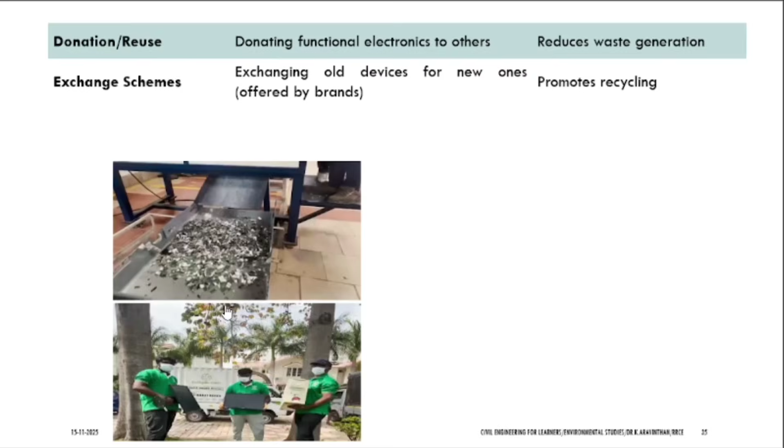In Bangalore you have a company called Zolopick, an organization. Whatever electronic waste you have, you just make a call for them, and they will come and pick the product from your house. It might be bulbs, electronic gadgets, whatever your e-waste is, they will give you the amount - whatever the resale amount is, they will give it to you. They will not ask for transportation charges etc.

Whatever your e-waste might be, from electronics items to ICT equipment etc., this Zolopick is available in Bangalore. This kind of thing is available, which you have to be aware of.

Sir, where to dispose you will not be knowing - we will put the used bulbs with the normal recycling bins. It should not be made that way. Why? Because fluorescent lamp bulbs contain mercury. If mercury is contaminated with the soil or water, it causes nervous problems for us.

Improper disposal through dustbin should not be made, as it causes pollution and health issues. Mobile phones, calculators, and old gadgets should not be thrown in landfill as waste. These are the basic principles.

After consuming e-waste, note that it should not be thrown in solid waste. Dry waste like plastics, glass items, paper waste, cardboard, and biodegradable items are called solid waste. You should not mix e-waste with solid waste. This is a rule. According to the Central Pollution Control Board, different types of waste are segregated.

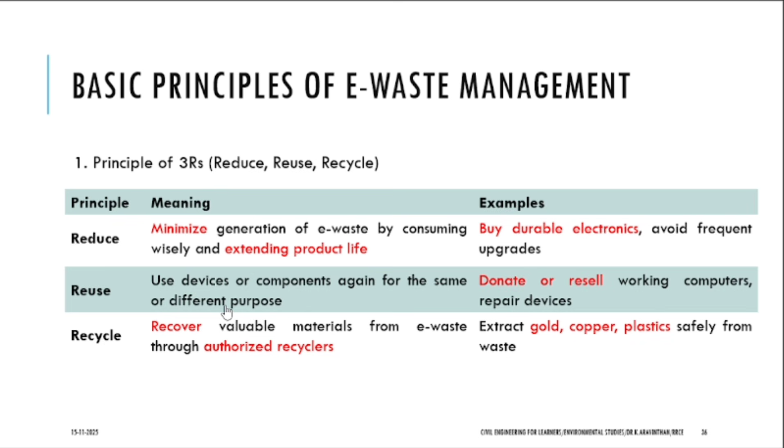So for this waste, either you have to minimize consumption, reuse, or recycle - the 3 R's. These three things only you should do. Or if it is not for use, you have to give it to the proper disposal places, not the dustbin.

Every product has a company, no? Electronic products, every product has a company. See, if you are disposing solid waste, you throw vegetables - do they have any company? No, that's why you cannot give it back. But for e-waste, everything has a manufacturer.

For the CCTV, for the wires, for the fan, check their website. I don't know how many of you have gone through that website. In this website, under e-waste management, if you call their e-waste management number, they will come to your doorstep and pick up the waste. You don't need to dispose it anywhere for any charges.

The manufacturer has a responsibility. They will come because in 2022, an amendment came. What is that amendment? It is EPR - Extended Producer Responsibility. There is a law according to 2022.

Every manufacturer should come and collect for free. They should dispose and recycle it. It is under the law. They cannot refuse it - if you call them, they will come and pick up whatever product they are selling, whether it's TV or mobile.

Otherwise, what they do is give an exchange program. Have you seen when buying mobiles, you can exchange your product for the old mobile? From 2022, this is Extended Producer Responsibility.

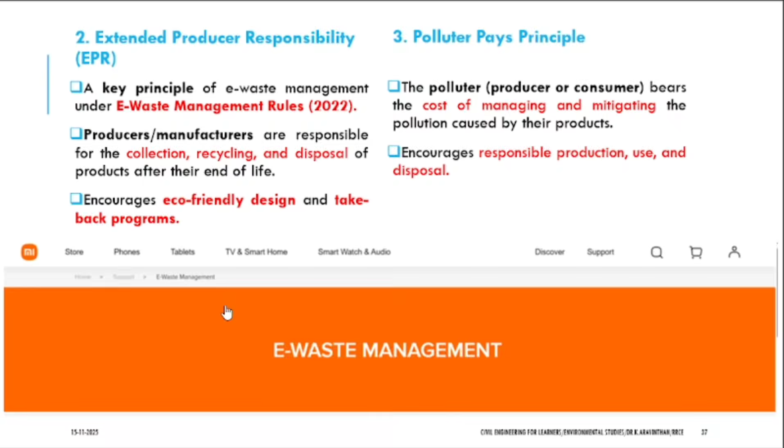Now, have you gone to the Mi website? Mi supplies the most number of electronic appliances, from housing appliances to mobile phones, TVs - all electronics items you have. You can return the old Mi product.

They will give you some cash back, 10% or something, but you can call this number if you have this disposal facility. Now, the principle of safe disposal is about where you should dispose.

This kind of fluorescent lamp, I told you what toxic chemicals are there - mercury. And from old TVs you have lead. So this will be discharged into the land or water, which will cause problems. Mercury comes from old CRTs, cathode ray tubes.

Due to that, flame retardant - if you flame it, it won't catch fire quickly. Have you seen? Take any electronic item, if you flame it, it will not immediately catch fire. That is called flame retardant. It's a chemical mixed with electrical and electronic items to reduce fire risk, but that causes harm to the environment.

For secure landfill, this kind of CD cannot be recycled and made into a new CD. See, if you throw a CD, you cannot make it into a new CD. If you throw a bulb, you cannot make it into another bulb. You have to incinerate it. Incinerate means in a closed chamber, you burn it. That is called incineration.

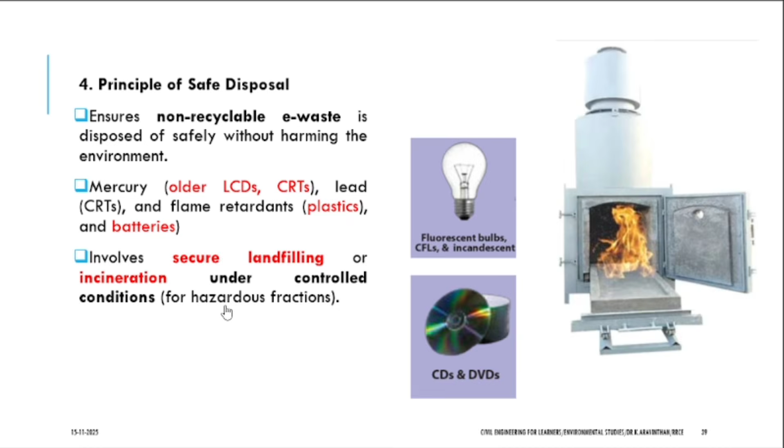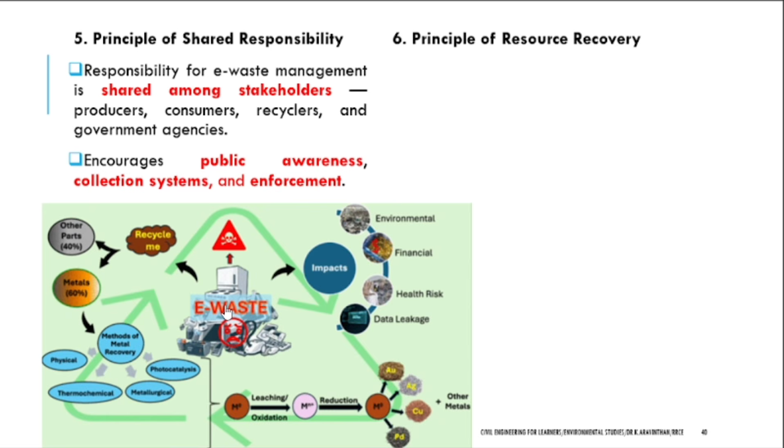Now, next is the principle of shared responsibility. That means not only the producer, but consumers, recyclers, and government agencies - all stakeholders for e-waste - are also responsible persons to take care of the e-waste system.

Now the principle of resource recovery is, after throwing e-waste, companies will separate it into whatever minerals are there. Have you seen circuit boards in electrical components or electronics? What are the metals you have in that? Copper, aluminium, silver, even gold is available. Like that, all the things will be separated using metallurgy. There is a phenomena called metallurgy. I hope you are aware of this.

Do you have metallurgical engineers? How you study electrical, the same way they study metallurgy. Metallurgy means how you can take different items from a heterogeneous component. Circuit boards have copper, aluminium, gold, silver, etc. At a particular degree of heat, the things will melt. If you have plastic in some material and heat it up to more than 90 or 100 degrees, plastic will melt. But silver will not melt, silver has a higher melting point. So according to the melting temperature, they will separate all the metals, and they will remake it into a new product.

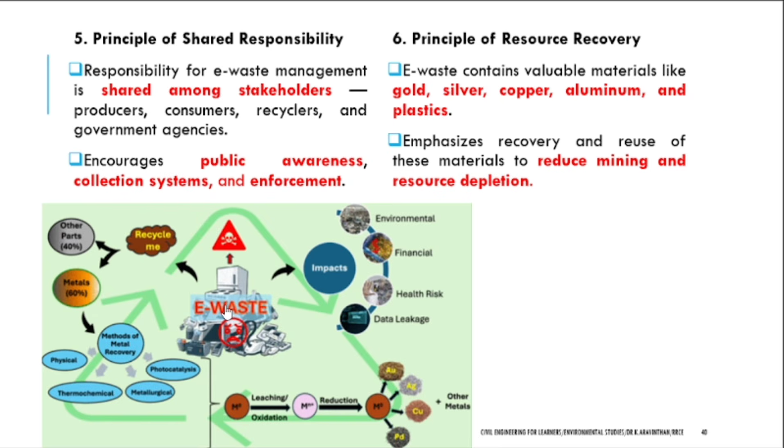Resource recovery, what e-waste is there, they will be recovering it. How much metal will be in e-waste is, on average, 60% is metal. Take this projector, if you weigh it, 60% of the weight is the casing, which is steel. Inside you have copper wires, then aluminium, so metals are 60%. The rest will be plastics and other items, glass items might be there. Overall, recyclable items in e-waste will be 70%, only 30% will be the rest.

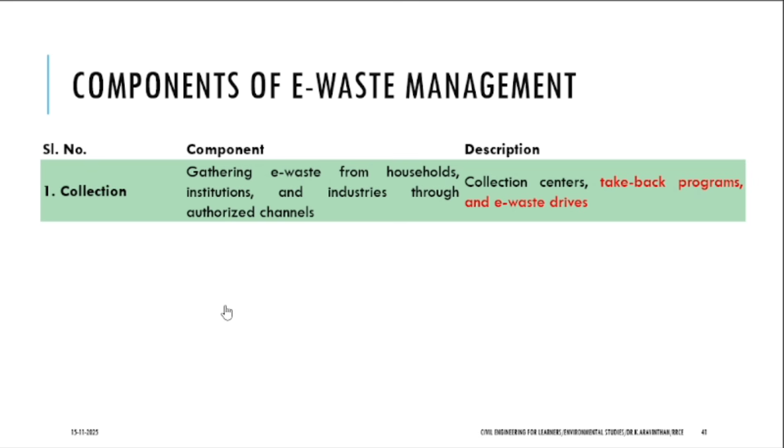So the components of e-waste management are: collection using a take-back program. First, how to collect the e-waste and what are its components. Then collection and segregation, meaning separation, in e-waste you have metals, plastics, glass items, and other minerals, they will segregate. Next is transport, when transporting, e-waste has to be labeled. You give it to the take-back program, companies that take your e-waste back, and then they have to label the product they received.

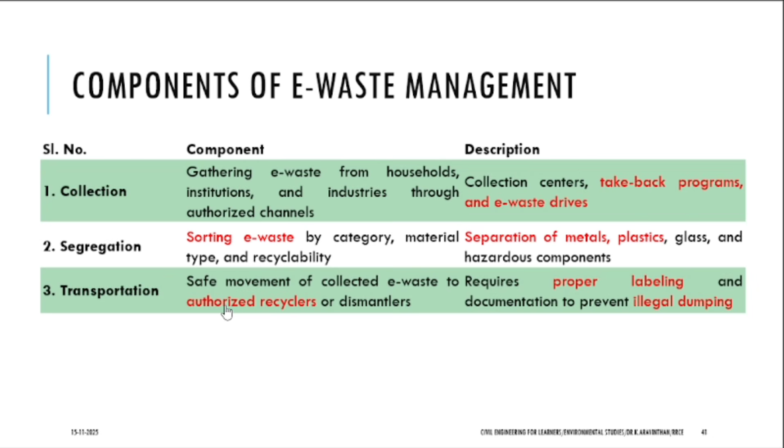Running a company is very hard. The manufacturing company has to report how much product they manufacture yearly to the Pollution Control Board. Each year, how much material they recycled, those statistics also have to be given to the Pollution Control Board, for license renewal. So imagine if a company generates 1 lakh of material, how much material they received for recycling. For that, companies use transportation with proper labeling and documentation to prevent illegal dumping.

Next is storage of e-waste, it should be stored in fire repellent places, moisture should not be there. Batteries can cause fire, if they get in contact with water, a short circuit will occur. Storage prevents leakage before processing.

Dismantling is done by authorized dismantlers, either manually or mechanically. After dismantling, recycling happens. They either use a mechanical recycler or hydrometallurgical process. Hydrometallurgy is using some acids in order to dilute all the elements.

Pyrometallurgical is burning. This is an example of pyrometallurgy. You see, these are all called pumps. In a pump, what material will be much higher? Copper, then steel, the casing and holdings will be steel, and you have copper. They do pyrolysis, what is pyrolysis? In a closed container, you send fire here with 0% oxygen, that is called pyrolysis. In the earlier slide I showed incineration, which is in presence of oxygen.

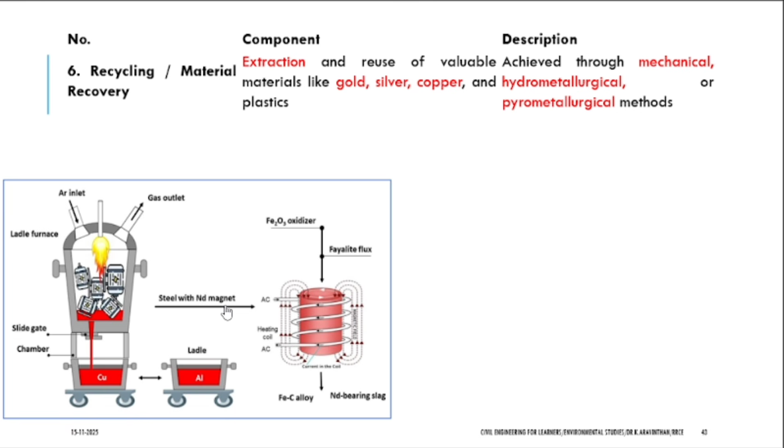If you are burning in presence of oxygen, that is incineration. If you are burning without any oxygen, that is pyrolysis. While doing this, you can separate copper and aluminium. If aluminium casing is there and mild steel casing is there, you can separate it. This is the art of deriving metals.

This is called hydrometallurgical, acid drips. Can you see the drips here? After separating the small components, acids will be supplied. From that, in different concentrations, the metal will start to dilute. If you use acids or liquid for this, it is called hydrometallurgical. By that, they extract uranium. If any uranium is in some e-waste, after this process, they will separate the uranium, and then treat the hazardous waste.

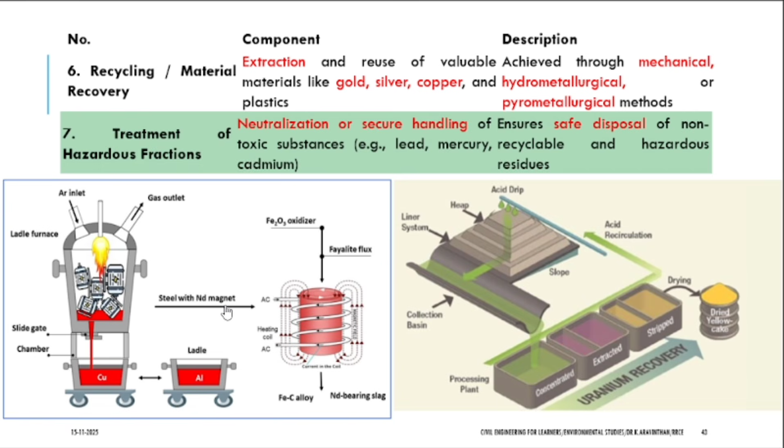Sir, certain waste cannot be treated. What they will do is send the antidote for it. If you have acid waste, what can you do? You can add base, isn't it? Then it will get neutralized. So like that, you can neutralize it.

And awareness on education. Last thing is legal policy. Sir, how government takes measures is via Basel Convention. There is a website for this.

Sir, for e-waste, which was the first country? The country which first talked about e-waste is Switzerland. In 1986, they discussed this, and in 1998, they brought the first law. Throughout the world, Switzerland is the first country to bring the law into amendment in 1998 to take care of e-waste. Around 116 countries discussed this in the conference.

From this, the well-developed countries collect all the e-waste. The underdeveloping countries have an MOU with them, saying we will discharge this much e-waste to you, so you will be paid this much. Like that, they pay them and discharge all the waste to them. So the country which doesn't have revenue takes this as revenue by accepting all the waste.

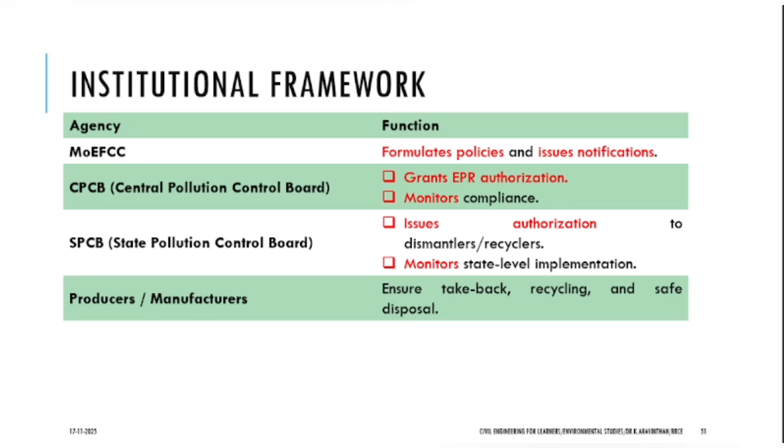Sir, government is running a ministry for e-waste, and this many organizations are there. What is the customer's responsibility? You should give it back to only two people. Who are they? Recyclers or the manufacturer. We have to give it only to these two. We should not throw it anywhere.

This is our responsibility. Now, the e-waste management rule—when is it effective from? The rule has been implemented in legislation from 2022, but it is effective from which date? 1st of April 2023. So manufacturer, producer—these things I have discussed with you.

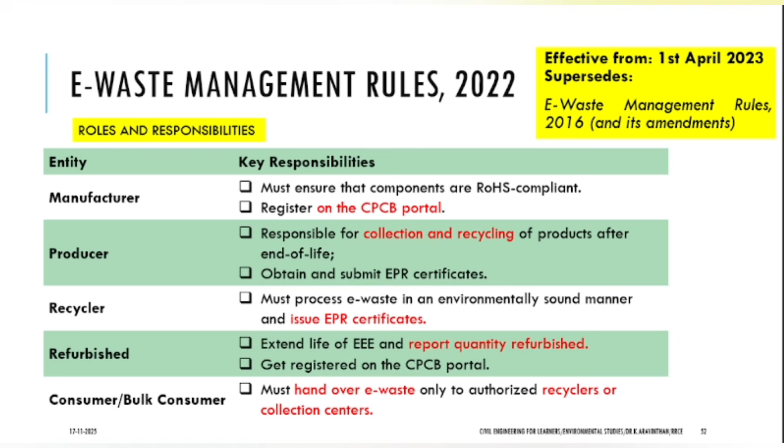Recycler, consumer, refurbisher is also there. Some people remake the waste product and make a new product which is second hand, that is called refurbished. Have you seen in websites how most electronic components are refurbished and sold at lower prices? So there is a refurbisher also. They can extend the products through the refurbished item.

So there is a website for this e-waste management system, launched by the Ministry of Environment, Forest and Climate Change. Anyone can visit this. Sir, how much e-waste exists in India? Who are the companies discharging the most e-waste? All the statistics are available in this website. The government manages it, and details can be taken from here. Who is responsible and not responsible, who are authorized—everything is given in this website.

A digital EPR portal has been released. Sir, from when is it released? From 2023 only it is released. This is the website you can visit. Entities covered range from manufacturer to producer—do you understand the difference between manufacturer and producer? Manufacturers use raw materials—see, you need leather to manufacture a shoe.

You need cotton to manufacture clothes. Is cloth directly available in nature? No, that's the raw material which they derive, and producer is the next level. The raw material processing is called manufacturing. Producers bring products to us - glass, clothes, rubber are products. What do we get out of rubber? Tires. Manufacturers will manufacture rubber only, and from that they take the rubber and manufacture the tires.

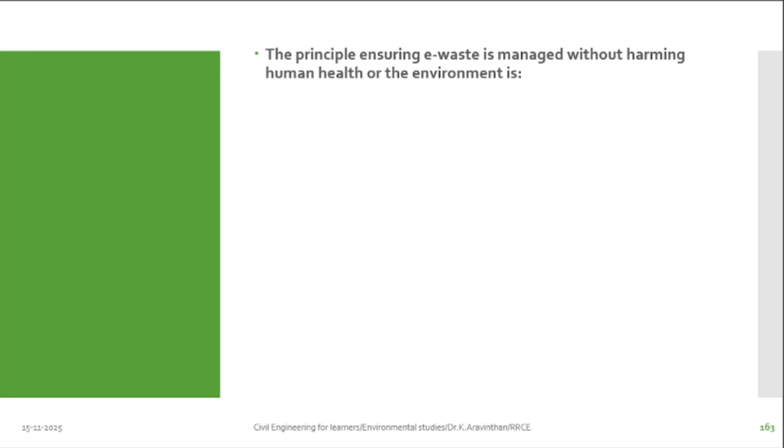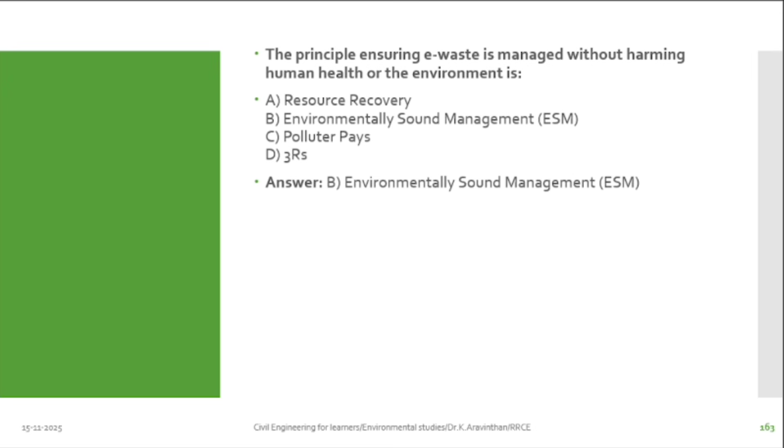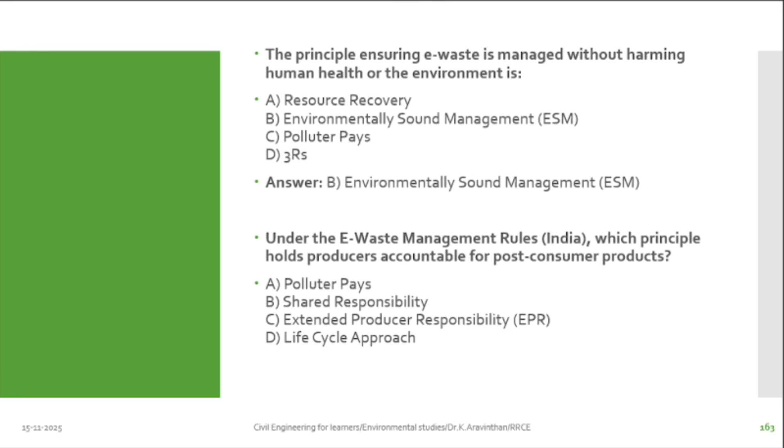Under the e-waste management rule, which principle holds accountable for post-consumer product? C is what? Extended producer responsibility.

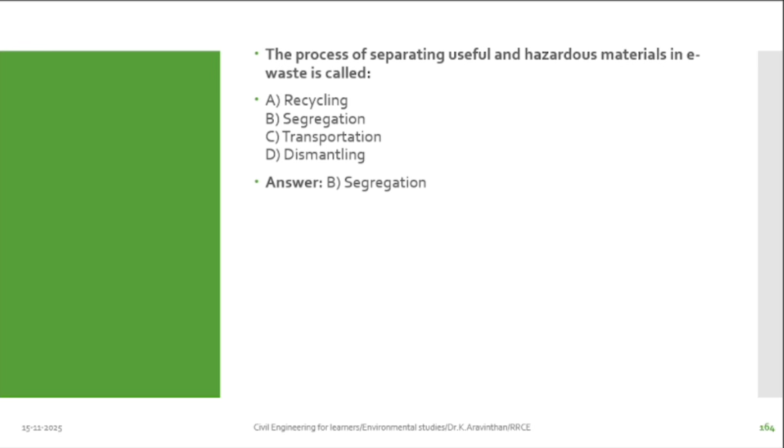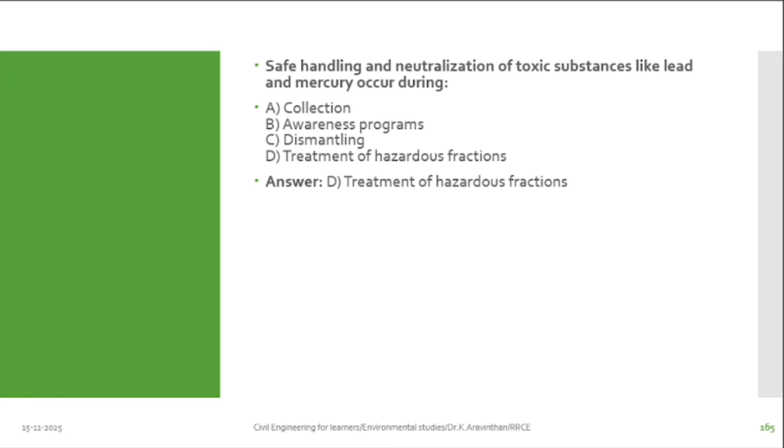The extraction of valuable materials like gold, copper and plastics is recycling. Yes. The safe handling and neutralization of toxic substances like lead and mercury occurs during treatment of hazardous fraction. Yes.

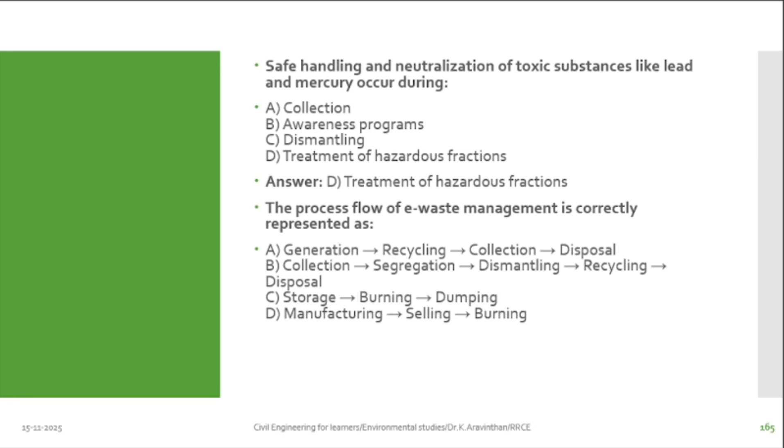The process flow of e-waste management is correctly represented as - what is the process? B: it starts from collection, segregation, dismantling, recycling and disposal.